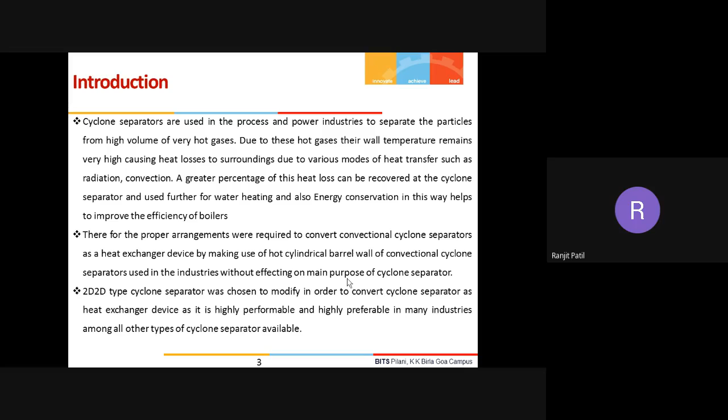So why not convert these walls to water walls? This is the one idea. But while doing everything, we should not forget its main purpose—that is what I'm telling in point number 2. We should be very careful that its main purpose, separating the particle from the gas, should not deteriorate—rather it should improve. Let's move to the next part.

Everybody knows this is a typical conventional power plant that I'm presenting here. I'm not going to discuss this much, but what I want to show is that in this conventional power plant, we are doing the combustion of the coal, and the hot gases, around 1300 to 1150 degrees Celsius, give heat to the riser tubes.

We are collecting the saturated steam in the top portion of the drum—this part especially is the evaporator. Then these hot gases pass over the other heat exchangers, the reheater, CSH meaning superheater, and the economizer, and then the air preheater, and then go out via the chimney.

In this conventional boiler, this portion is the evaporator, which has several riser tubes. We will now fix a device called the cyclone separator between the risers and the heat exchangers. Before sending the hot gases, at around 1150 degrees Celsius, towards the reheater, superheater, or economizer, we pass this gas through the cyclone separator to remove unburned coal particles or any other particles, and then send the clean gas towards the reheater.

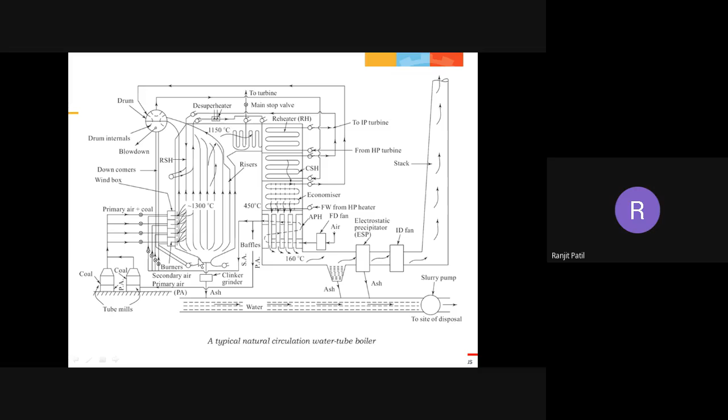So now we have to discuss what we have done, what sort of modification we have made, what patent we have filed, and what idea we have developed to improve this cyclone separator's efficiency and to save energy.

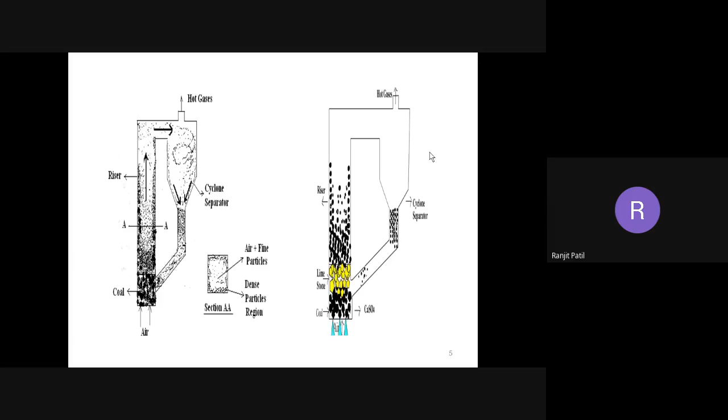So let's move ahead. I told you that we are working on the Lapple 2D. Lapple is the one who proposed this 2D type of cyclone separator. It is famous in the cyclone separator world, I mean, this is a more famous cyclone separator.

Moving further, the motivation of this study is to make these cyclone separators more efficient in separating particles even less than 10 microns, and to make them function as a heat exchanger in order to save heat loss due to radiation or convection.

The gas plus coal or sand particles entering the tangential inlet have very high temperature, around 800 degrees Celsius, and they take several turns through this cyclone. So the outer wall temperature of the cyclone separator is very high, and because of that it loses heat to the surrounding.

So we have to save the energy here. For that, we are proposing something called helical fins. What we have to do now is put the helical fins on the cylindrical portion.

The fin has various sizes like 5 mm, 7.5 mm, and 10 mm. What that size means, I will explain in the next slide, and the pitch variation also I will explain in the next slide.

So remember, we are attaching the helical fins to make this cylindrical portion a water wall. What will happen is when the hot gas touches these fins, it will give heat to the fin, and inside the fin we are circulating water, so the water will absorb that heat, and basically we will save the heat loss from the cylindrical wall of the cyclone separator. This is the idea.

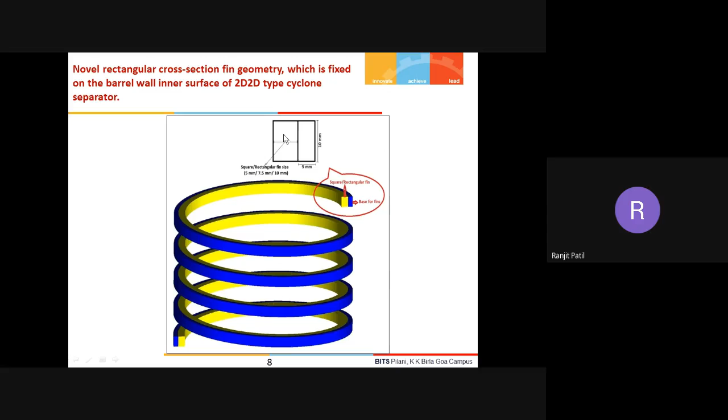Only the size of the fin in this rectangular or square cross section varies. Suppose initially it is 5 mm, then it is a rectangular fin. If it is 7.5, it is still a rectangular fin. When it becomes 10 mm, it is a square fin, because the height is also 10. This portion, 5 mm by 10 mm, is basically a solid base with thickness. This blue color line is the solid portion, and this rectangular part is hollow, through which the water will flow - meaning the left hand side rectangle.

Now going further, you can see how we have constructed the cylindrical portion. This is the proposed novel rectangular finned cyclone separator after modification, varying in fin size: 5 mm, 7.5 mm, and 10 mm, as I told you a few minutes back.

I'm talking about the size - 5 mm, 7.5 mm, moving a little inside, 10 mm, meaning this depth in the horizontal direction, the fin size has increased to 10 mm. This particular case is for the 30 mm pitch size.

Pitch means a distance. Suppose this is one fin, ending over here. The fin to fin distance means you take the center point on the first turn, and then measure the distance at exactly the same point on the second turn. So the distance between two consecutive points - the first turn's midpoint is here, the second turn's midpoint is here - the distance between them is the pitch, that is 30 mm.

So we have to vary that pitch from 30 mm to 50 mm. With increasing the pitch, the number of turns will decrease, as you can see in the next slide - once we increase the pitch, the number of turns has been reduced.

And the fin size also varies - here it is 5 mm, here it is 7.5 mm, and from this wall to here, it is 10 mm. Now for your understanding only, I have shown these fins, but in the realistic case you really cannot see the fins like this.

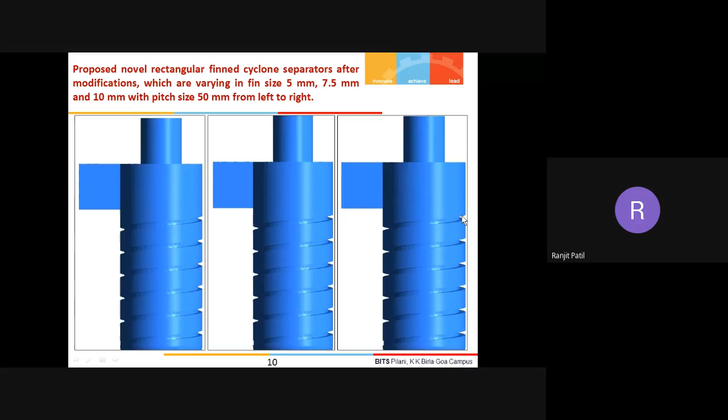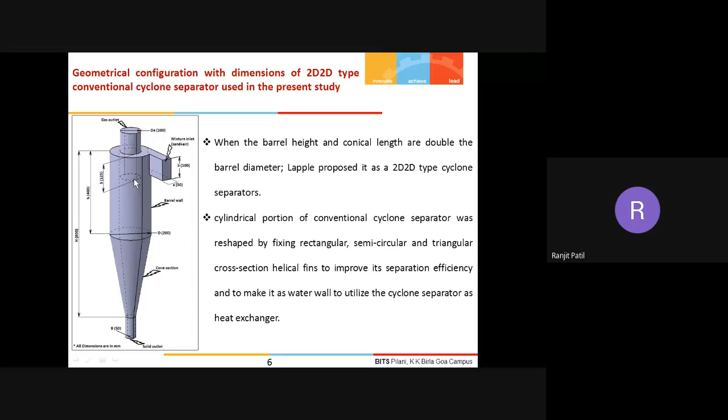This is the portion through which the water will be flowing, and we are attaching the fins inside. So from outside, the separator will look like this, but you cannot see the fins attached inside. This geometry is shown for your understanding purpose only.

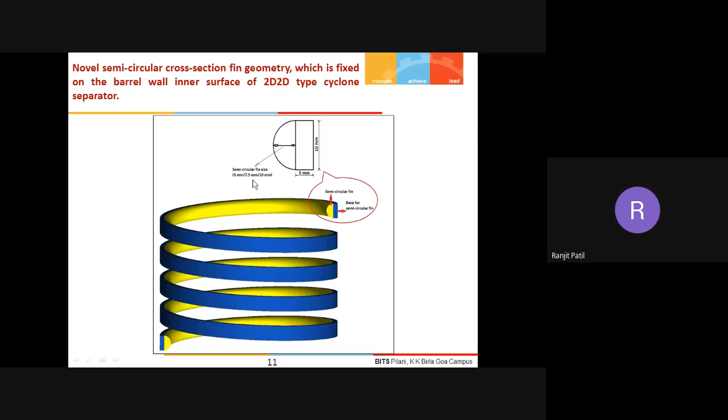In the same way, now you can see this semicircular fin. The blue color portion is a solid base, and the semicircular portion is the hollow part through which water will flow. Again, this will vary - 5 mm, 7.5 mm, 10 mm. This is typically the presentation for the semicircular fin with 30 mm pitch, and here it is 50 mm pitch.

Then further the triangular fin - you can see the blue color portion here, and we are making the triangular fin like this. Its size will vary like 5 mm, 7.5 mm, and 10 mm. You have to increase the distance to this apex point. Suppose it is 5 mm, then for 10 mm you move further, for 7.5 it will be something like this.

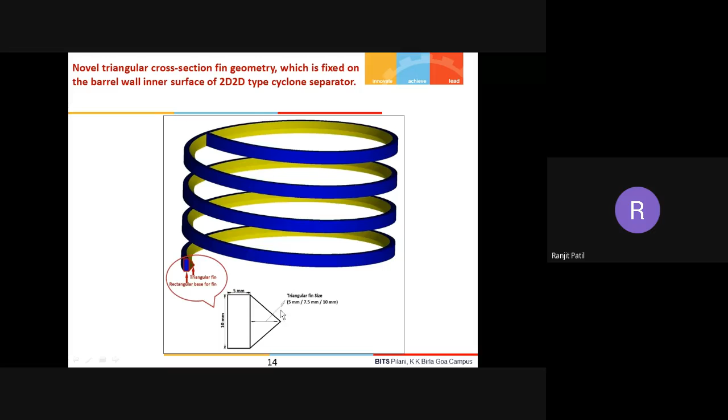So basically you have to increase the cross section area of this triangle. It will look like this for 30 mm pitch, the triangular fin will look like this, and for 50 mm pitch the triangular fin will look something like this.

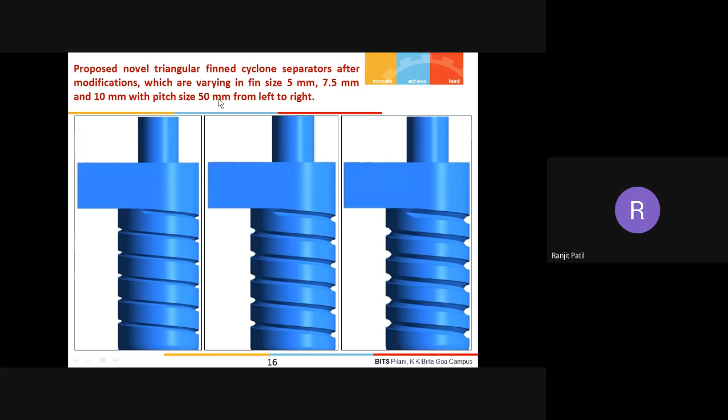Now next part is we have used the ANSYS software and done the simulations. For that we have used unstructured mesh, with hexahedral elements at the core, prismatic cells near the wall, and tetrahedral mesh in between the hexahedral and prismatic cells. The prismatic mesh near the wall captures the boundary layer physics, and the tetrahedral mesh connects the hexahedral and prismatic elements.

From our experience we can tell this is the best combination, because near the wall we have to capture the physics with fewer elements, so prismatic cells are very useful. If you use hexahedral cells there instead, your number of cells will increase and your computational time will increase.

So this is the arrangement here. This is the core portion, meaning one side of the wall. This is the wall of the cyclone separator, and suppose this is its center. Here in the core you have hexahedral cells, near the wall you have prismatic cells, and in between that there is a tetrahedral cell.

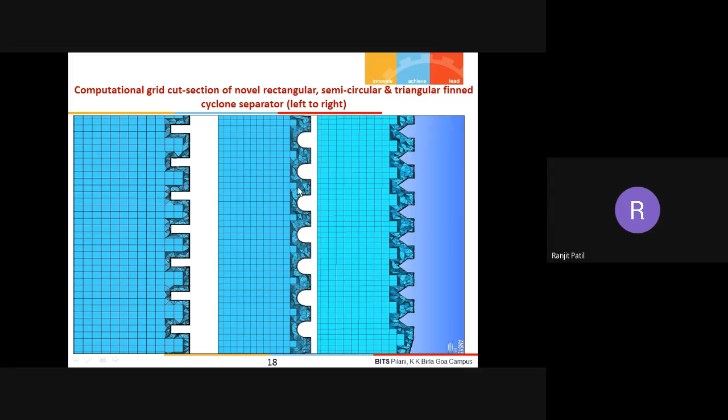The boundary conditions and all that are mentioned particularly in our paper. You can refer to our work published in the ASME Journal of Heat Transfer, Powder Technology (a journal of Elsevier), and Separation Science and Technology, a Journal of Taylor and Francis. We have done a lot of work published in different journals, and we have also filed one patent. If you want details, you can refer to these papers later.

These are the boundary conditions — in CFD we have to give boundary conditions and initial conditions, and the convergence criteria, everything is mentioned in this particular slide. This is the normal procedure or practice, and we are also following this.

But the important part here is the mesh dependency — whatever mesh you are choosing matters, because there is a highly swirling flow in the cyclone separator. So the Reynolds stress model is used, not RNG k-epsilon or other turbulence models, as this is already well investigated by many researchers. We went directly with the Reynolds stress model. But whatever mesh type we use is also important, because for highly turbulent flow, to capture the physics near the wall, our mesh near the wall should be very refined.

So we have measured the Y-plus value, which is less than 40. What's important is whether the mesh size we are choosing gives accurate results or not — that's the interesting thing. So you can see here we used 337,000 nodes, sometimes 600,000 nodes, and around 1,300,000 nodes, and then we checked.

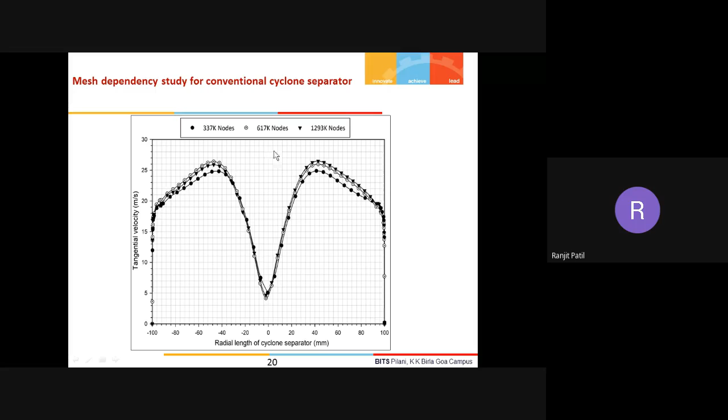Going further, we have compared our results with the experimental data available in the literature published by Wang et al. Our results with 600,000 nodes are coming quite reasonably, matching within plus minus 10%, and therefore we have validated our results.

This is not just a validation of mesh, it is the validation of everything, including the mesh type, mesh size, as well as what turbulence model you have chosen, what boundary condition you have chosen, what convergence criteria you set, what is your y plus value.

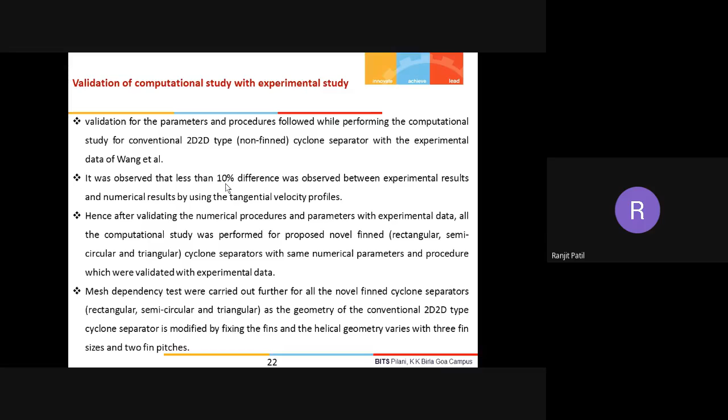You have taken everything which is now reflecting in this slide, and it tells us that the experimental values and computational values are very close to each other. It means whatever you have done in meshing, in post processing, whatever models you have chosen during simulation, all are working good. You have done the right thing, you have chosen the right algorithm. This slide is perfectly telling about the validation of computational study and experimental study, which is what I explained orally.

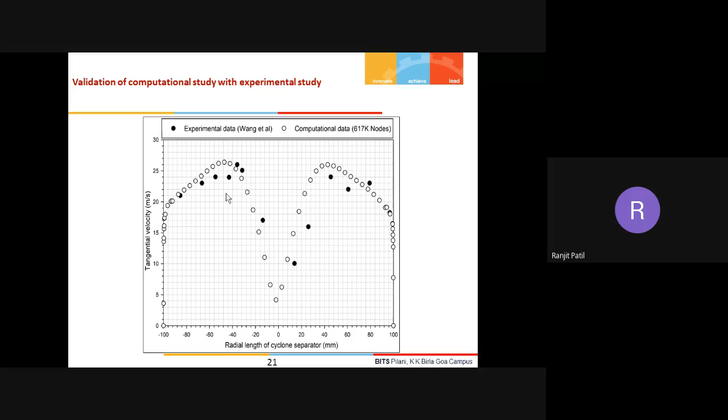Instead of reading all these points, let us move to the next part. One point I forgot to tell you: this validation we did was for the non-finned cyclone separator, purely the conventional non-finned cyclone separator, because Wang used a non-finned cyclone separator in his study. So what are we doing now? We are moving to the next step.

We are putting one helical fin, and the helical fin has a cross section that is either rectangular, semi-circular, or triangular, and it has variation in its size as well as pitch. So we are now talking about the square fin or rectangular fin.

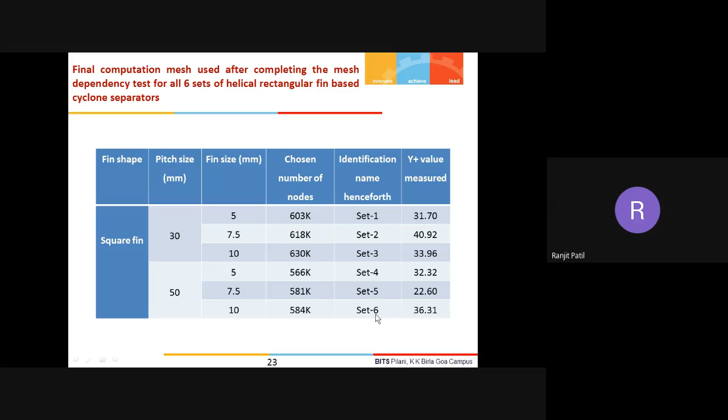Pitch size will be 30 or 50, size will be 5, 7.5, 10, and the mesh we have chosen is around 600,000. You can see this here. This is called set 1, 2, 3, and so on. Y plus value is also measured over here.

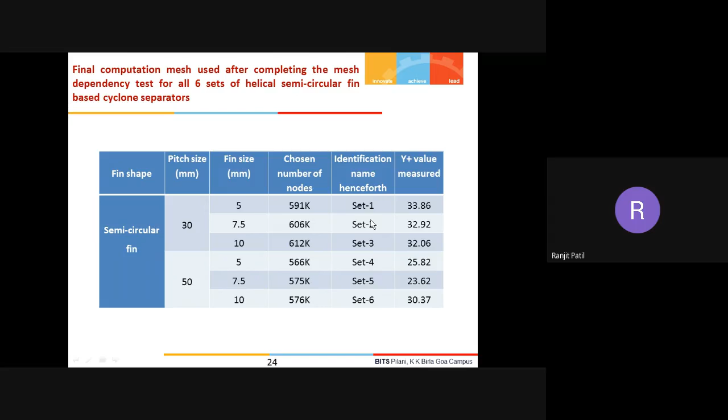Then this is for the semicircular fin. You can see the number of nodes are around 600,000. And in a similar way for the triangular fin.

After doing all these things, now we have to discuss our results. This is the first slide where, remember, whenever we do a study on the cyclone separator, 4 things you always have to remember. You have to obtain the axial velocity curve, the tangential velocity curve, and find the axial pressure drop.

You have to find from where the particles take the reverse turn, meaning at what distance above the solid outlet they take the reverse turn. These 4 things you have to find, and then plot a graph of separation efficiency. Because if someone asks you tomorrow why the separation efficiency is what it is, what is the physics behind it, to support your result you must obtain these 4 graphs: axial velocity, tangential velocity, axial pressure drop, and the point from where reverse flow takes place.

So now we are discussing the results on the rectangular fin. In the rectangular fin, you can see we are comparing it for the 5 mm fin size with 30 mm pitch, 7.5 mm fin size with 30 mm pitch, 7.5 mm fin with 50 mm pitch, and so on. Like 6 sets we are comparing over here.

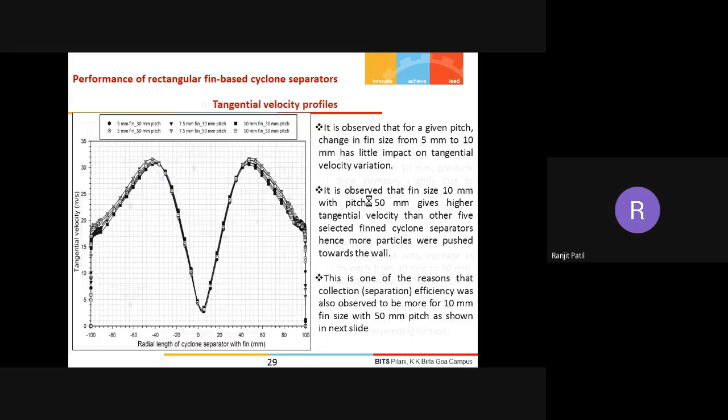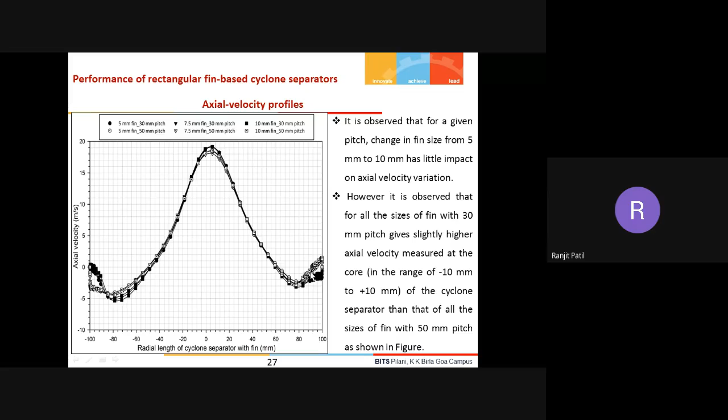This is already discussed, related with power consumption. This is the factor impacting separation, that is tangential velocity. And now I will show you the third factor.

Okay, so from this, what can we conclude? Before going to conclude, let me show you a few other things.

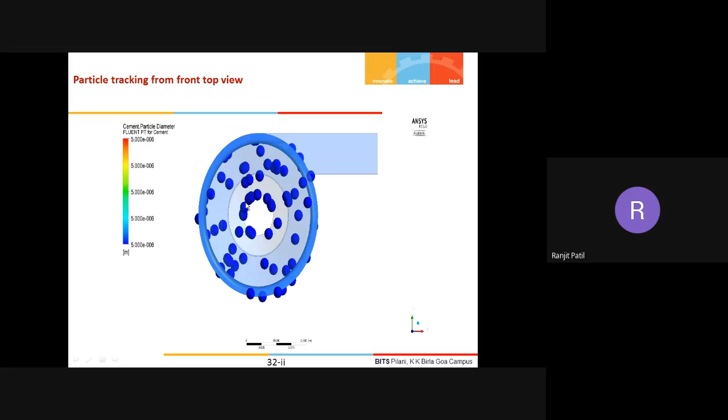So when you do the simulation, you can see for the non-finned cyclone separator, the number of particles here will be less, and for the finned cyclone separator, the number of particles will be high. That is what I presented in my previous slide. So now, next part I would like to show you.

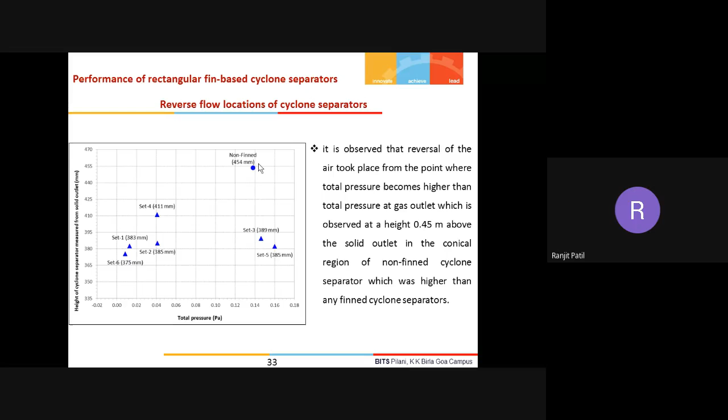But overall, what is the conclusion out of all these rectangular fins? The conclusion is something very important. The present study observed significant changes in the fluid dynamic characteristics of the finned cyclone separator. The axial velocity in the downward direction in the dense particle regions near the wall was observed to be lesser in a finned cyclone separator than in the non-finned cyclone separator. However, it is compensated by collecting more particles in the gap pitch - gap meaning the pitch between the turns of the helical fin.

Additionally, tangential velocity was improved with the finned cyclone separator, which helps push the particles toward the wall, which further move downward toward the solid outlet, helping to improve the separation efficiency.

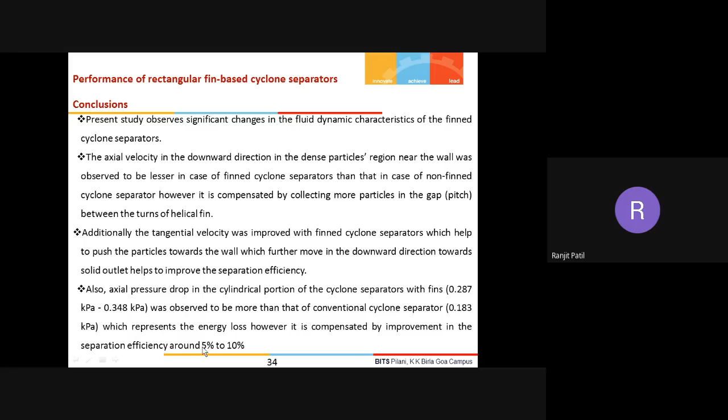Also, axial pressure drop in the cylindrical portion of the cyclone separator with fins is in the order of 0.287 to 0.348 kilopascal, observed to be more than the conventional cyclone separator, which is hardly 0.183, representing the energy loss. However, this is compensated by the improvement in separation efficiency of 5% to 10%, for the very fine particles.

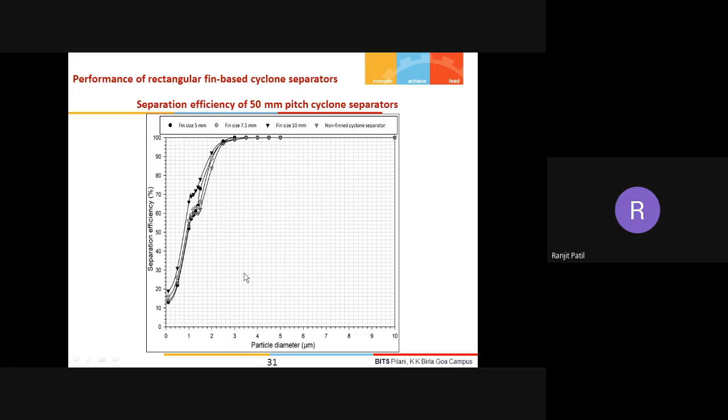You can see, for very fine particles, I have already shown you the separation efficiency graph. For particles like 0.1 micron, 0.5 micron, 1 micron, 2 micron, 3 micron, we have improved their efficiency in the order of 5 to 10%. It is really a good achievement.

Then the next point. The height of the reverse flow, I have already explained to you. So let's move straightforward to the final conclusion.

The finned cyclone separator helps reduce environmental pollution by capturing very fine particles below 2.5 micron, which otherwise cause serious health issues. Many people suffer from lung problems because polluted air causes lung damage, ultimately what you can call black lungs. Emission gases and particulate matters cause breathing problems.

So if you are eliminating and keeping the very fine particles from going outside, it really helps us. That's how finned cyclone separators help us, to the extent of 5 to 10% improvement in collection efficiency for very fine particles like 3 microns, compared with the non-finned cyclone separator.

Pertaining to this finding, it is recommended to consider the cyclone separator with 50 mm pitch and fin size of 10 mm in order to achieve the highest efficiency, if we are discussing the rectangular fin based cyclone separator.

So the next slides follow in a similar way, now discussing the semicircular fin cyclone separator. I have taken only the rectangular case in detailed manner. The physics for semicircular is the same, but the results are different. So instead of discussing all these results in detail, let me just show you.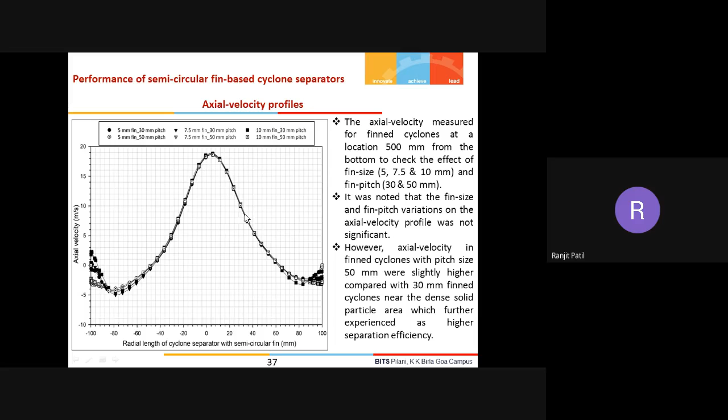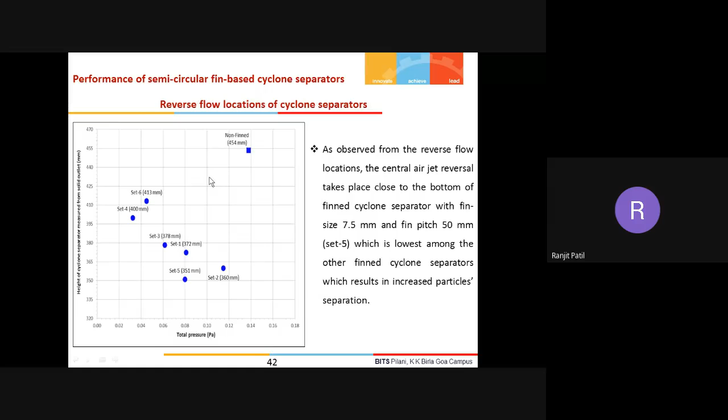These are the axial velocity profile, axial pressure drop, and tangential velocity for the semicircular fin cyclone separator. Then separation efficiency for 30 mm pitch and for 50 mm pitch for the semicircular fin. This is the reverse flow for the semicircular fin, and you can typically see more particles at the solid outlet for this type of semicircular fin cyclone separator.

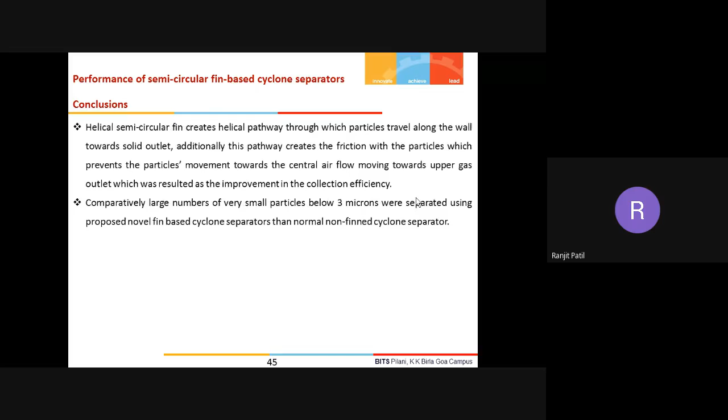So what is the conclusion? This conclusion is very important for us. Separation efficiency of the semicircular finned cyclone separator with fin size 7.5 mm and pitch size 50 mm was observed to be highest among the selected 5 sets of semicircular finned cyclone separators, giving around 11% more efficiency than the conventional cyclone separator.

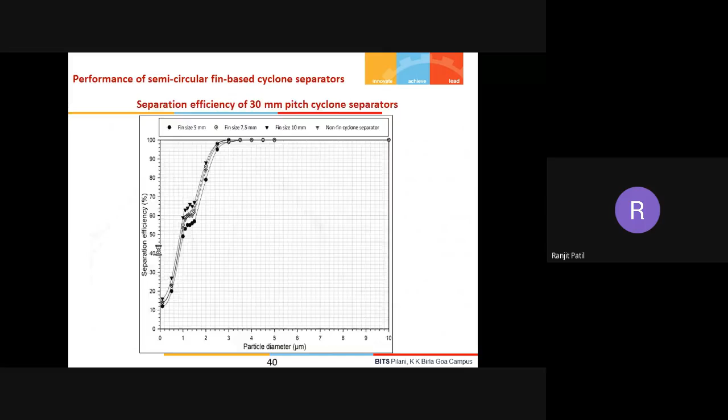So the result here is different. For the rectangular case, what was the conclusion? It was not 50 mm... let me check, let's go back and see what size we recommended there.

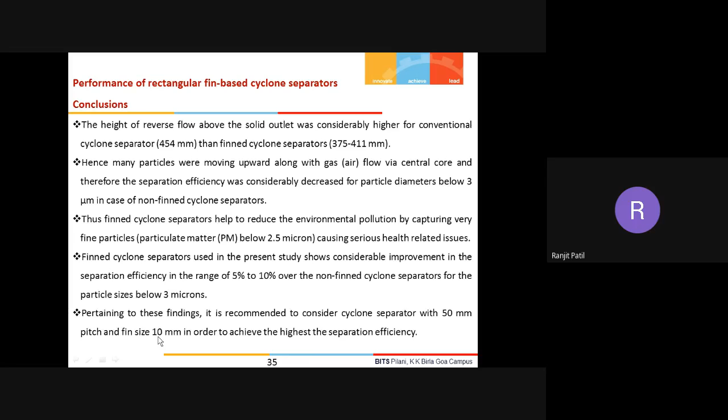Here it is 50 mm and 10 mm. It is recommended to consider the cyclone separator with 50 mm pitch size and 10 mm fin size for highest efficiency with rectangular fins. But for the semicircular case, the conclusion is 50 mm with 7.5 mm. So just remember, 10 mm with 50 mm pitch size for rectangular, and 7.5 mm with 50 mm pitch for semicircular.

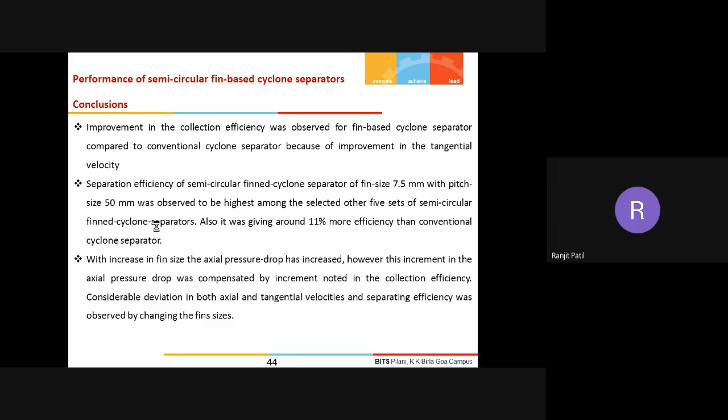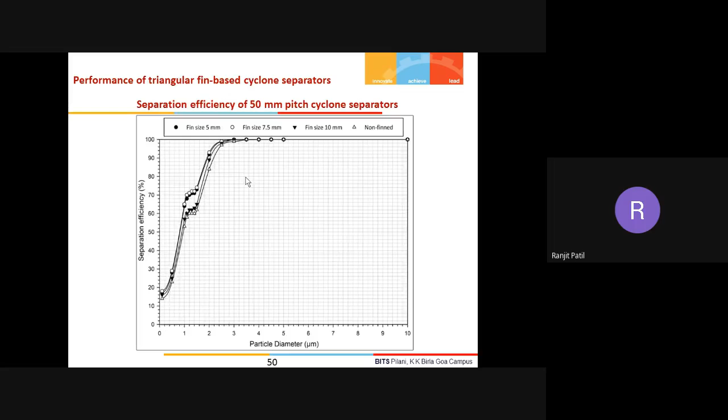So now if we move further for the triangular fins, again the axial velocity profile will come, axial pressure drop will come, tangential velocity profile will come, separation efficiency, and again separation efficiency for 50 mm. The previous slide was for 30 mm.

And then what is the final conclusion? The final conclusion is here: the separation efficiency of the fin cyclone separator with a triangular cross section, 7.5 mm fin size and 30 mm pitch is giving the best result.

So now what is the conclusion from this fluid dynamic study? We are concluding that for rectangular, triangular and semicircular fins - initially we discussed rectangular - the 10 mm fin size with 50 mm pitch is giving better results. In case of semicircular, 7.5 mm fin size with 50 mm pitch is giving better results. For triangular, 7.5 mm fin size with 30 mm pitch is giving the best results.

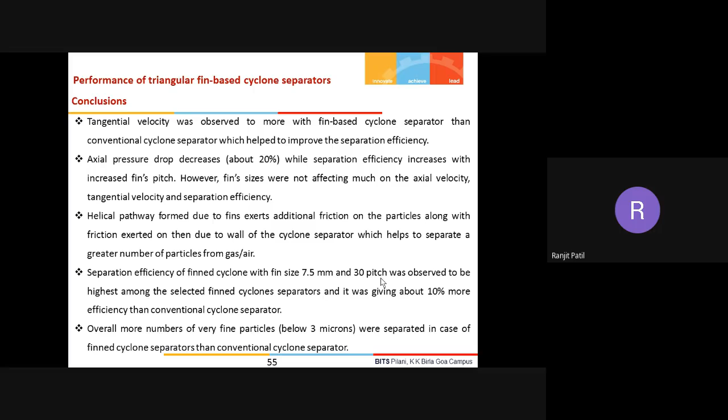So different fins are giving different results because of their geometries, because of their shapes. And the physics behind this is what is your axial velocity, what is your tangential velocity, from where the reverse flow is taking place. That's what we have justified. We have given the reasons, we have given the physical interpretation for why this is all happening.

So from this, what then do we have to do? We have went ahead, because finally one aim is achieved. What is that? We have proved that by adding these fins, we are actually improving the performance of the cyclone separator in terms of their collection efficiency.

The dangerous particles, those below 10 microns or 5 microns, we are capturing them. Conventional non-fin cyclone separator was not able to do that much, but we have improved their efficiencies by around 10% over conventional cyclone separator efficiency. We have improved by 10% in capturing very fine particles, those in the size 2.5 microns to 5 microns. So this is the achievement.

Now we can definitely go ahead for the heat transfer study, because now we have to send water through the fins, and we have to save the heat loss through convection and radiation, which normally happens with the conventional cyclone separator. But now the question comes: which fin do you opt for? Whether it will be circular, semicircular, rectangular, or triangular. For that, we have studied something here, which is mentioned.

Now we will read, because this slide is very important. Hydrodynamic study on finned rectangular, semicircular and triangular cyclone separator and conventional cyclone separator was carried out in order to find optimum fin geometry, optimum fin size and optimum fin pitch. In total, there were 18 finned cyclone separators, which varied in fin geometry like rectangular, semicircular and triangular, with fin sizes 5 mm, 7.5 mm, 10 mm, and fin pitches 30 mm and 50 mm.

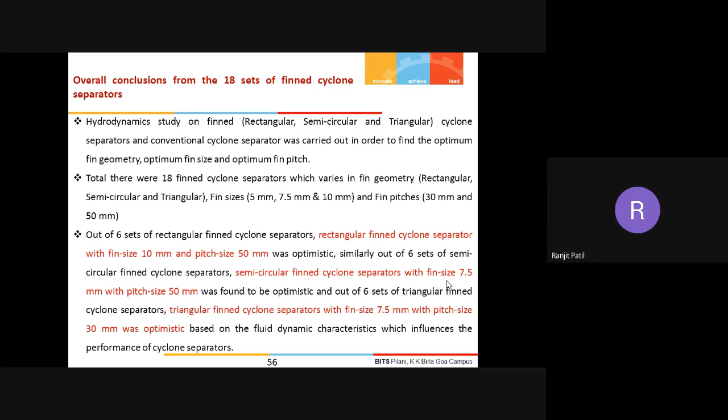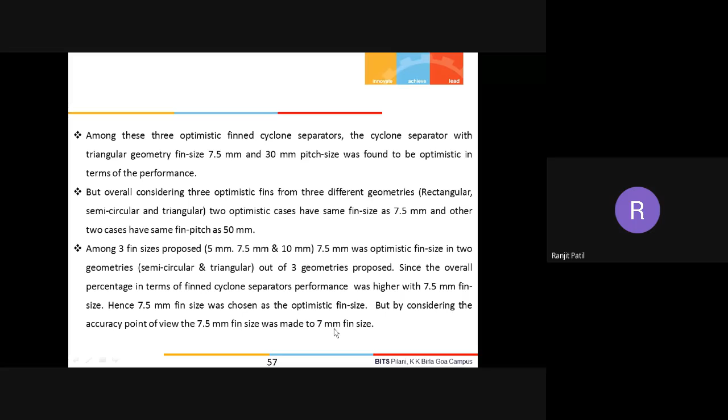Now the next question is whether to opt for 30 or 50 pitch. What we have done next is, instead of taking 50 or 30, we have taken 40 as the average pitch size, and instead of 7.5, we have rounded off to fin size 7, which we chose for the heat transfer study.

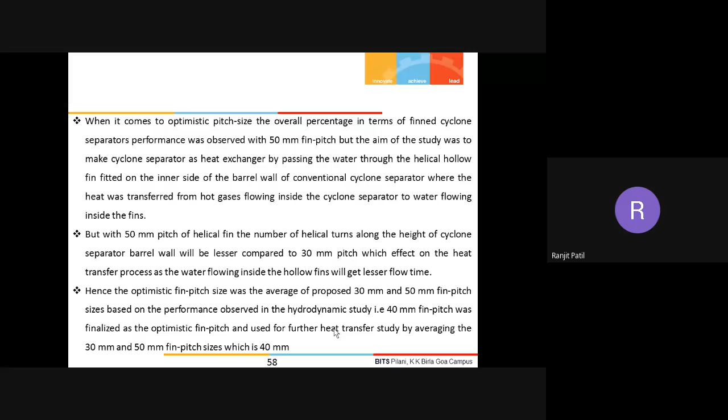But before heat transfer, we again compared the rectangular, semicircular and triangular fins for the 40 pitch with size 7. We studied their fluid dynamic characteristics, and then we went ahead with heat transfer studies. So let me show you what we have done.

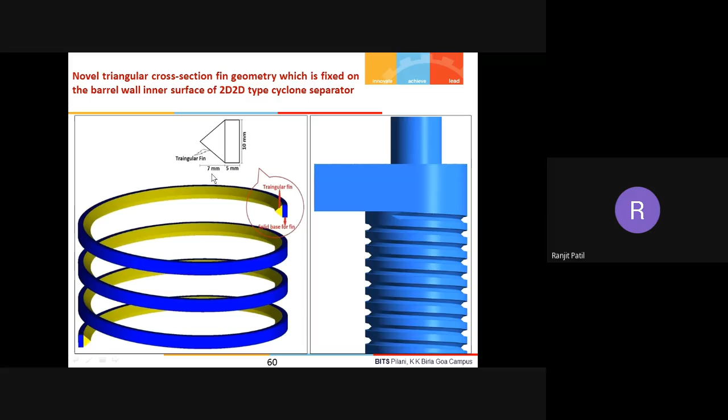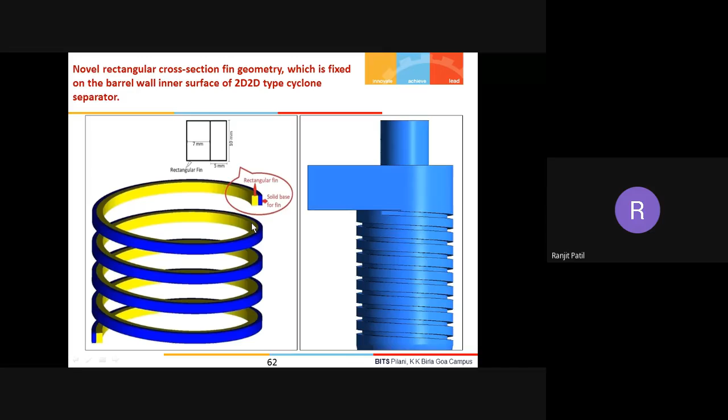Here you can see the fin size 7 we have taken, and the pitch we have taken as 40. This is for the triangular, semicircular again with 40 pitch and size 7, and this is for the rectangular with the same 7 size and 40 pitch.

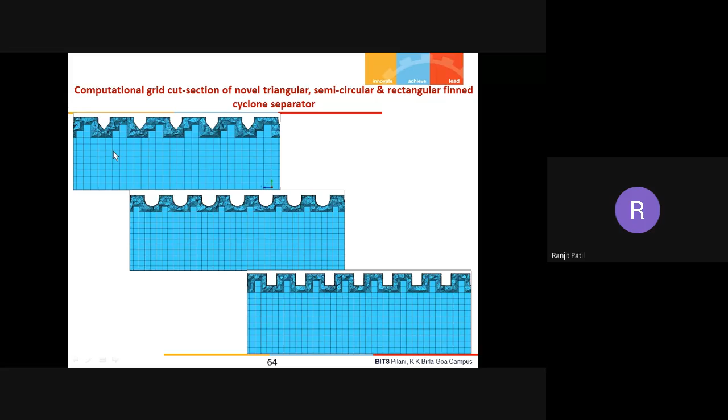And again we have done the same meshing, which will look something like this. This is for the triangular, this is for the semicircular, this is for the rectangular, and then this is all about the boundary conditions.

We have again done these meshing comparisons with the experimental data, and then we went ahead and did the mesh independence study for the triangular mesh and the semicircular mesh, after which we started comparing their axial velocity profile.

You can see this is the triangular axial velocity profile, plotted at 300 above the solid outlet, 500 above the solid outlet, and 700 above the solid outlet. So this is the axial velocity profile for fin size 7 and pitch 40.

Same way, we have done this for the semicircular fin and the rectangular fin. For our interest, we measured the axial velocities at 300, 500 and 700 above the solid outlet along the height of the cyclone separator.

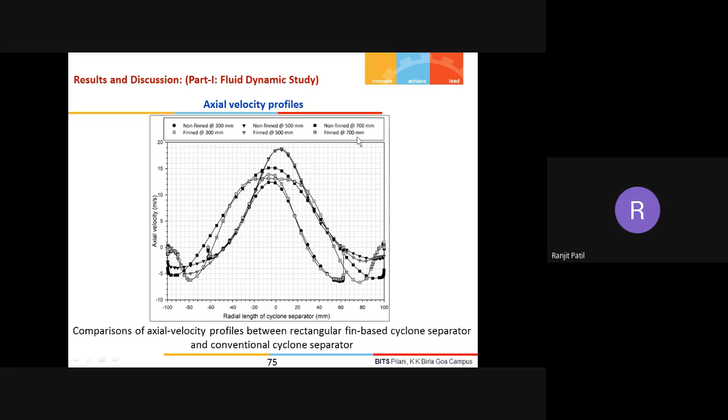But this graph is important, because here we are comparing the triangular, semicircular and rectangular fins once again, and we observe clearly that for most of the cyclone, the axial velocities for the three fins are coming close to each other.

However, you can see the triangular fin, this circle here, gives more negative velocity near the wall compared to the other two, when you compare the three axial velocity profiles for the three fins under the same operating and geometrical conditions. The triangular fin gives a higher negative velocity near the wall compared to the others, so that is a good sign.

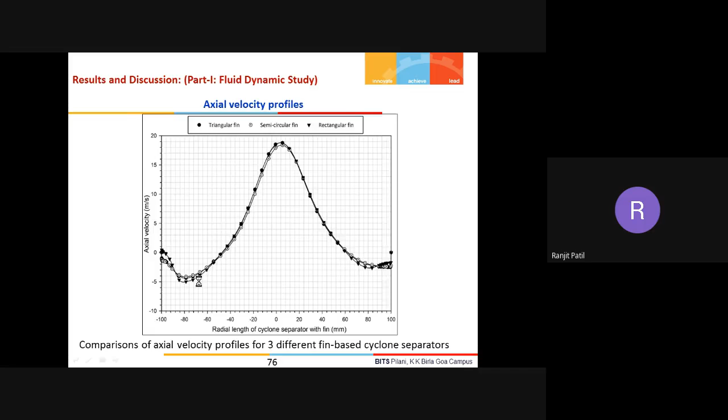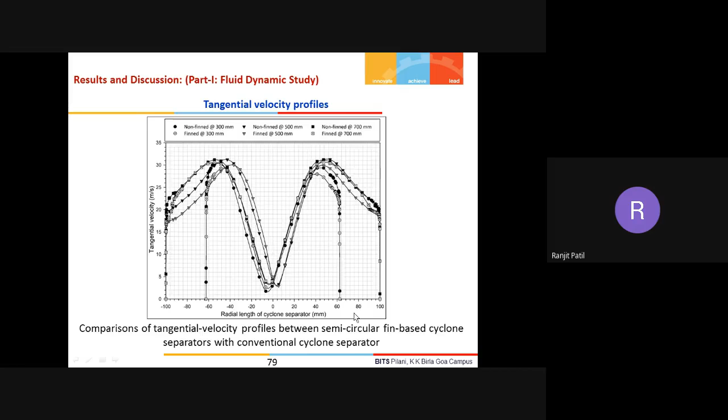And if we compare the axial pressure drop, again we have plotted it. Now this is the tangential velocity profile, this one for the triangular fin, then this for the semicircular fin in this slide, and the next one is for the rectangular fin.

So this slide is important. Here we are comparing the tangential velocity profile for the triangular, semicircular and rectangular fins at 500 distance, and you can notice that overall the triangular fin has more tangential velocity. So both tangential velocity and axial velocity, meaning the negative velocity near the wall, are higher in the case of the triangular fin.

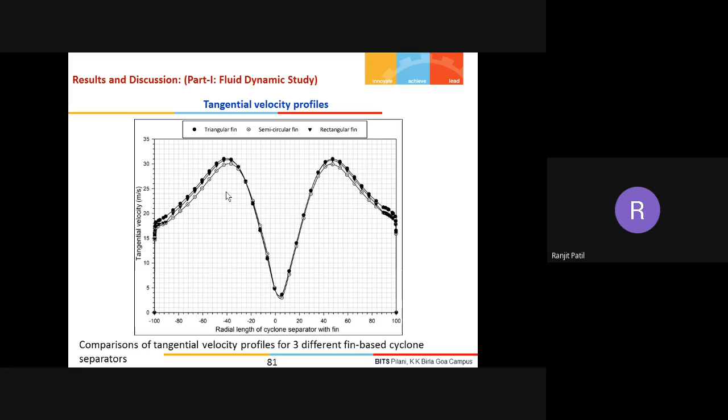When the particles are moving with high speed near the wall, the downward velocity is more for the triangular fin, as well as tangential velocity is more in case of the triangular fin. So in the triangular fin, the particles are more pushed toward the wall. That is the case, and therefore we are happy with the triangular fin.

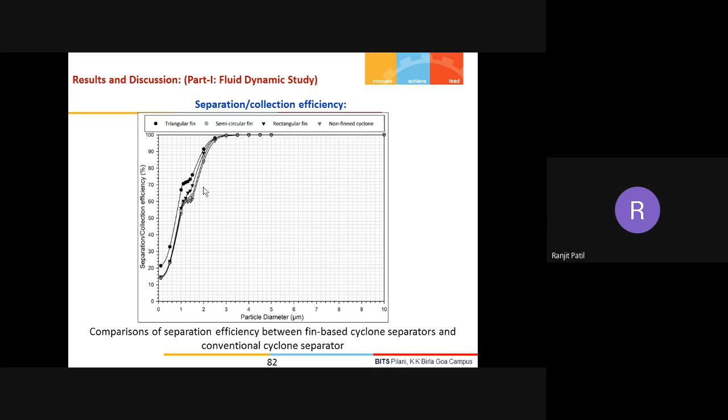So this is what you can now notice in the concluding remark, but let me take you before that. The axial pressure drop, we already know, is more in a finned cyclone separator, but the tangential velocity for the fin based cyclone separator was more than for any conventional cyclone separator. That is also what we have observed.

So next point: a large number of very fine particles below 3.2 microns were separated in case of the fin based cyclone separator in comparison with the conventional cyclone separator. This is also what we have observed.

But the important point is the last two. For particles below 3.2 microns, collection efficiency for the triangular fin based cyclone separator was observed to be more than that observed in the other selected fin based cyclone separators. It is more than non-fin, but also more than semicircular and rectangular fin based cyclone separators.

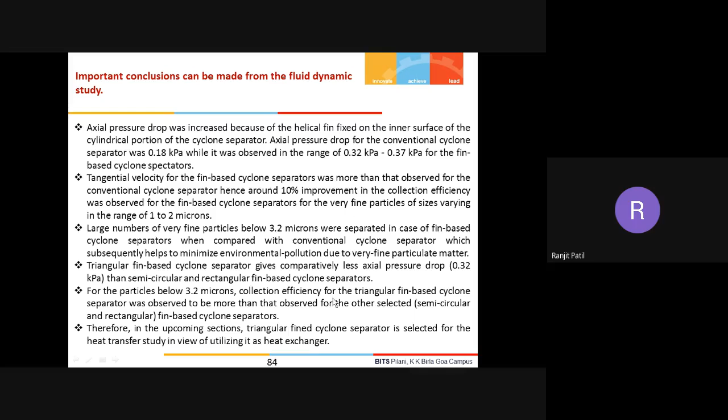Therefore, in the upcoming section, the triangular fin based cyclone separator is selected for the heat transfer study, utilizing it as a heat exchanger. So if anybody wonders, we have not randomly decided to go with the triangular fins. We have seen where we are getting more separation efficiency, and now the heat transfer study starts.

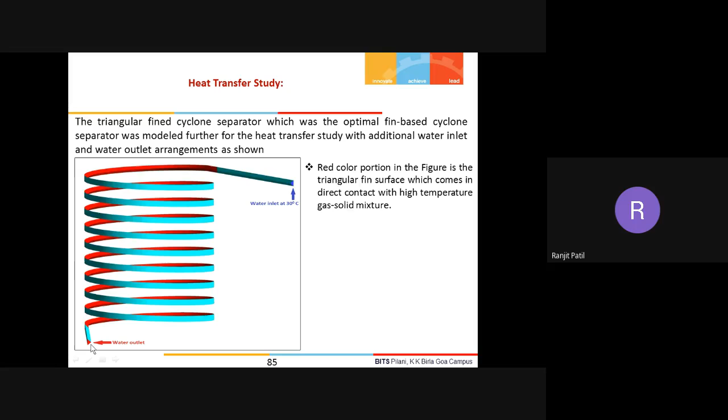So in this case, you can see this is the triangular fin we have used, and we are sending water at 30 degrees Celsius, and here the water coming out is red because it is getting hot. So then you know what we have done — the simulation — that I will now be presenting. This is how the meshing has been done and all that.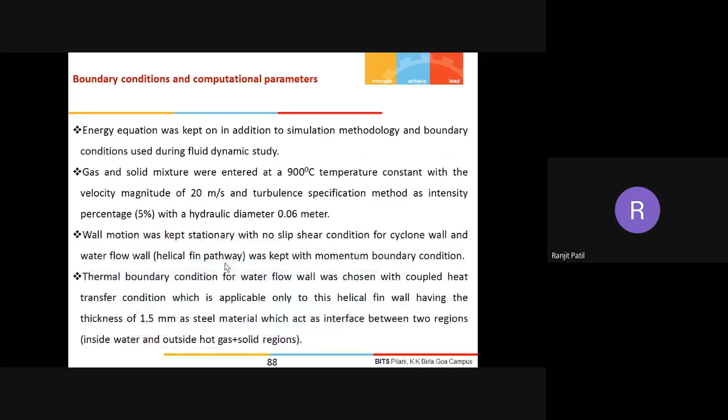This is all about the meshing and boundary conditions, but we will not go into that; instead let me explain how we have studied this. This is the mesh independence study, and I have already explained how to do the mesh independence, so let's come to this slide.

Result and discussion: energy conservation through the temperature gain. So we have basically chosen the 40 pitch and the 7 fin size triangular fin.

At the inlet we have given the velocity; we have sent the water at 0.5 kg per second, in the second case 1 kg per second, third case 1.5 kg per second, fourth 2, fifth 2.5, and the last one 3 kg per second.

We observed that with decreasing mass flow rate, the temperature gain is normally increasing, because with slower flow rate, the water remains in contact with the hot gas for a longer time, so the temperature gain was observed to be more. The initial temperature was around 30 in every case, but with the smaller mass flow rate, like this blue line with 0.5 kg per second, at the outlet we are getting a 3 degree Celsius gain.

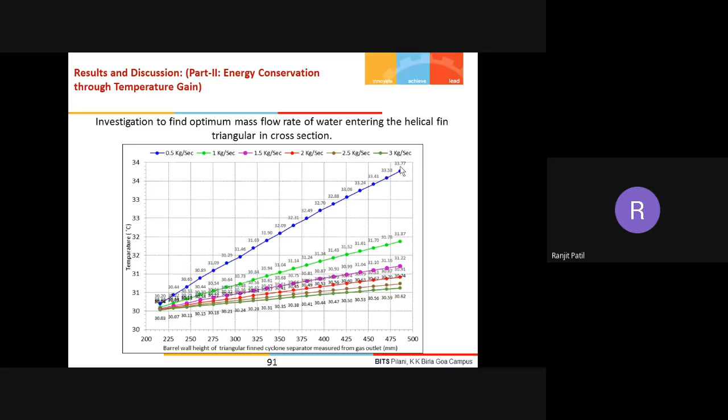So just imagine, this is what we are getting over a distance of 400. If we are getting this much achievement over 400, it is really a very good achievement - we are getting a gain of 3 degrees Celsius in temperature.

So then what we have done - this is the first turn where the water is entering, then the second turn, third turn, fourth turn, and so on through several turns. At the ninth turn, the temperature is higher, something like this slide shows.

So now what we have done is a scale-up study. In the earlier study, over the 400 mm size, we achieved a 3 degree Celsius gain - water was entering here and coming out as hot water with a 3 degree Celsius increment. Now we have increased the scale, doubling the size of the cyclone separator while keeping the same fins - triangular fin with 7 mm size and 40 mm pitch. We literally doubled the 400 mm to 800 mm, and then compared the results. Instead of showing contours now, let's see this.

Let's see this first, and then I will go back to the slide. You can see this is a turn - 1, 2, 3, 4, 6, 7, 8, 9, 10. This indicates the number of turns. So for the 400 mm cylindrical portion height, for that particular cyclone separator, there are a total of 19 turns coming.

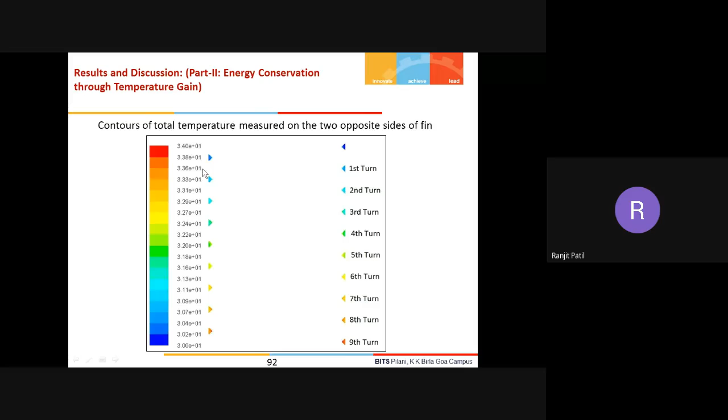I showed you earlier, like you can see over here - let me take you back. 9 turns means 9 into 2, because this is 9 turns - first turn, second turn, third turn, and so on. If there are 9 here there will be also 9 more. So in that way there are 19, because 1 is over here - I'm counting, this is point 1. Turns are 19, but between these 2 turns, this point is considered the additional point. So if there are 9 plus 1, that's 10, then 11, 12, 13, 14, 15, 16, 17, 18, 19. So at these 19 points we are measuring the temperature, and that is what is presented by this blue line.

When we scaled up, enlarging the size from 400 to 800 mm, we actually get a total number of 39 turns. But look at the temperature improvement - this vertical scale indicates the temperature improvement. Initial temperature for the small scale cyclone separator was 30, and by the 19th turn it becomes something like this - a line close to 30. You can see this circle is 30 degrees Celsius. So here we are around 33. Basically the 3 or 4 degree Celsius gain - if you see the fourth circle, it is around 35. This is the circle for 35. So we are close to 35.

So 3 or 4 degrees Celsius gain we got at the exit. But for the red color, we started with 30 degrees Celsius, and when we reach the last turn where the water is coming out, we reach almost 45 degrees Celsius. So a 15 degree Celsius gain is achieved in just 800 mm height.

So if you just imagine, industrial boilers are in the range of 10 meters height. So when the cyclone separator cylindrical portion becomes 5 meters in height - here we are at 800 mm, which is close to 1 meter - if we increase the height 5 times, the gain will definitely be more. Here we're getting a 15 degree Celsius gain for 800 mm or say 1000 mm height of the cylindrical portion. If it becomes 5 meters or 5000 mm, the gain will not just be 15 degrees Celsius, it will be more, because with increasing height the gain is increasing.

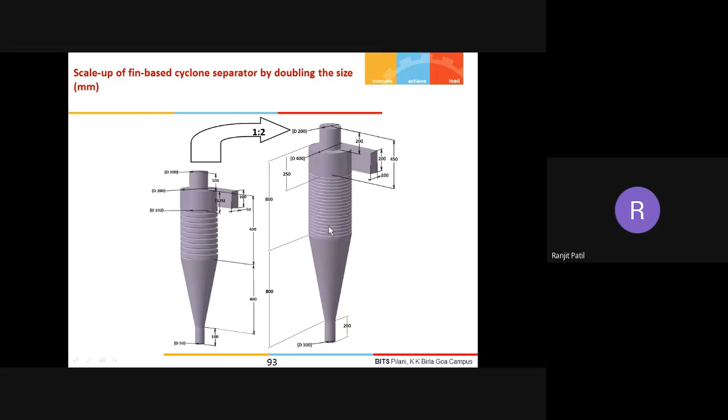So scale-up non-finned means if we take the cyclone separator of 800 mm cylindrical portion height, and compare it with the scale-up triangular fin cyclone separator with 800 mm height of cylindrical portion, you can see the scale-up triangular fin cyclone separator is still giving better efficiency for very fine particles. So with scale-up study, our separation efficiency is either more or close to the conventional cyclone separator. It is not getting down, not decreasing.

So we are not deteriorating or impacting badly on the function of the cyclone separator, rather it is improving. So we can definitely go ahead with putting such fins and conserve some heat or energy, and you can see the water temperature has increased by 15 degrees Celsius. So that is the gain.

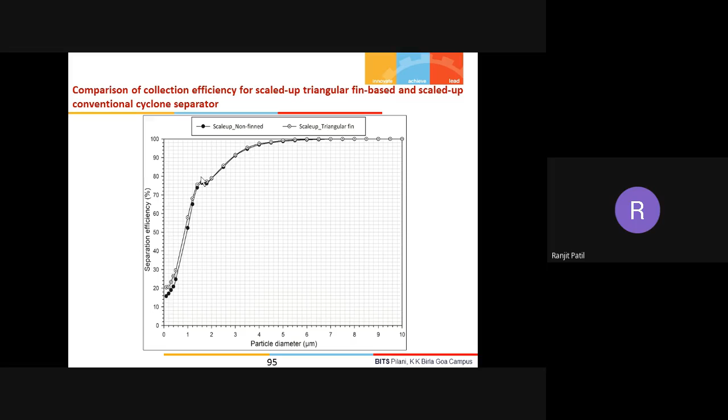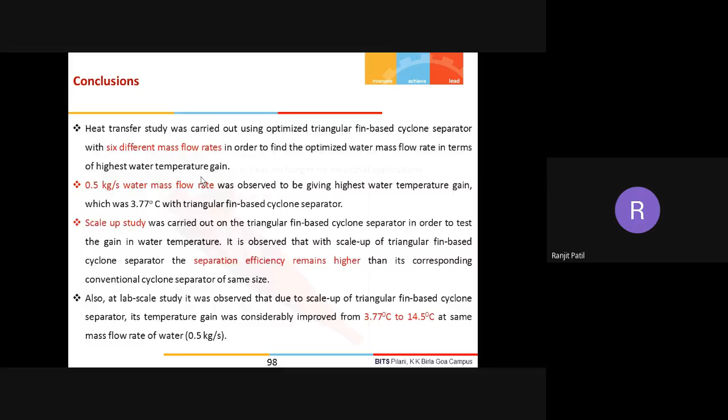Either the separation efficiency will always remain improved, and we can say separation efficiency is anyway improving, but on the other side, because of fins, water is getting the heat and therefore we can save the heat loss. So this is what is going on in BITS Pilani, and we are working experimentally as well as numerically. Thank you.